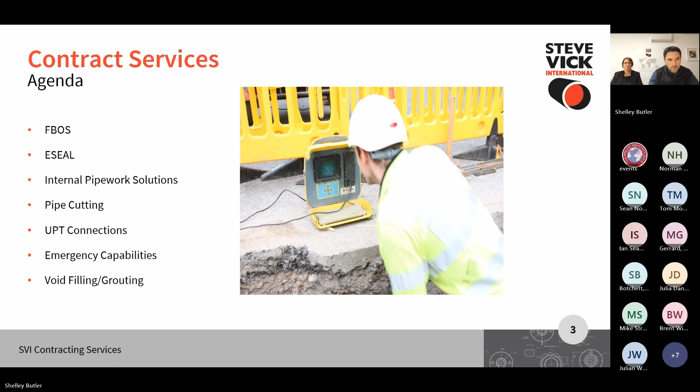For those of you that don't know, Steve Vick, my father, founded the business in 1981, and contract services has been at the heart of the business since its inception, first delivering foam bags to flow stop small diameter mains, all the way up to the much larger diameter mains that we now flow stop, and the range of services that I'll go through with you this afternoon.

We've branched out into other areas. From gas, we went into water, and now we carry out projects for the Nuclear Decommissioning Authority, and even work branching out into other things like civils as well.

So the company, we have 115 people currently employed by Steve Vick International. We have 6 depots spread around the country to serve our customers across the whole of the UK, and we have a mix of uses in these depots. Some are just bases for our contract service teams, and others are a place of supply of our products for our live mains insertion techniques and our hire business.

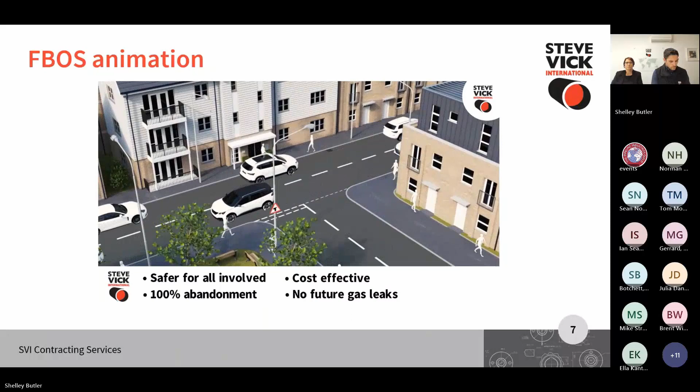The average cost for an FBOS insertion is about £3,500, which compared to the traditional three-way traffic management, reinstatement, and the issues that go with that, is very competitive. To date, since the approval in 2020, we've carried out over 1,100 successful FBOS operations. As we've added to the size range, originally 4 and 6 inch, and now up to 8 inch, the technique will prove to be incredibly popular.

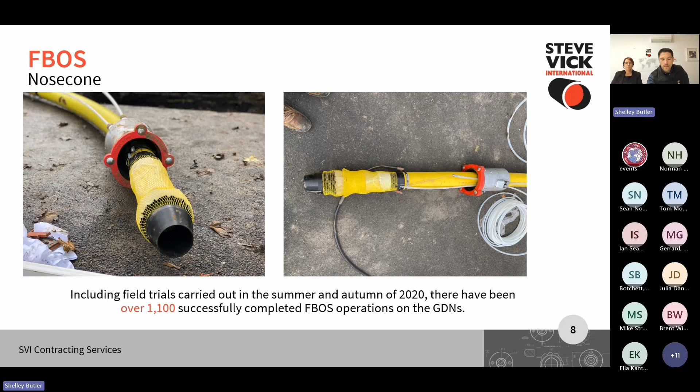Another technique that has been developed with successful collaboration with the UK gas distribution network is eSeal. This was developed in partnership with Northern Gas Networks, where you have FBOS, which is the replacement of a stub, while eSeal provides the complete abandonment of a tier 1 stub. We cover the same size ranges up to 8 inch.

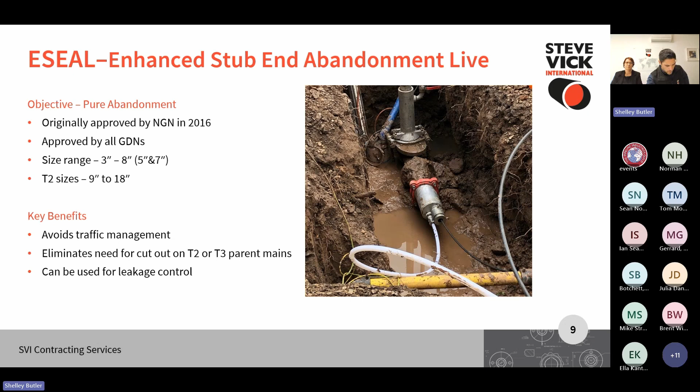So the foam bag on eSeal is housed in a small capsule that allows it to navigate some bends. And when it is at the final transition point, which is marked on the right-hand side there in a red square, the foam bag is then deployed and then straddles that final transition joint, and then the foam is then filled, then leaving the main dead.

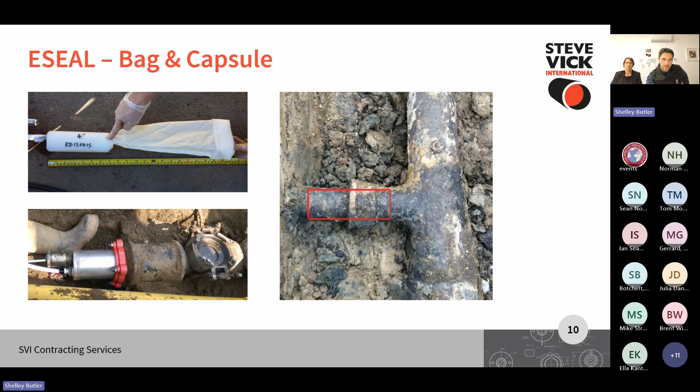So just to go into a bit more detail, the main is flow stopped using traditional foam flow stopping bags. Then the glam box is attached to be surveyed using a camera to check for size changes or off takes. Using the camera, the bag is then placed directly on that final transition joint. A set amount of foam is injected into the bag and allowed to cure for 30 minutes. When the main is left to decay, the rest of the stub is filled and handed back to the client.

The cost for eSeals are competitive again with the cost of a cutout of a parent main connection and can be installed from distances at over 50 meters. The typical cost for an eSeal over a 10-meter distance is about £2,300.

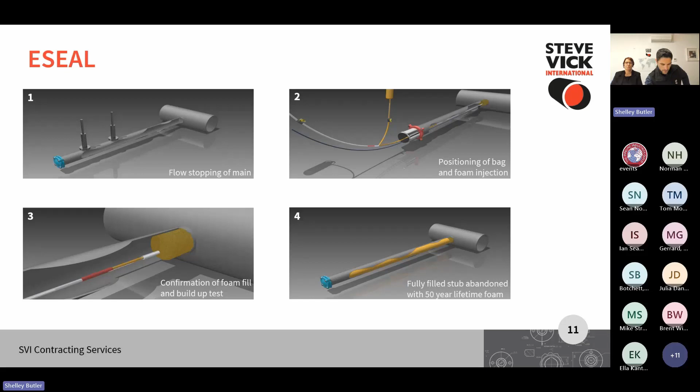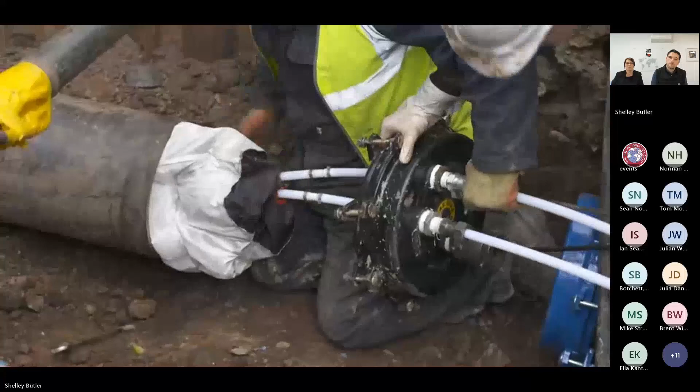But I think the technical gremlins have taken over. Apologies, everybody. Can you just check that everyone can hear me? Can you understand the video? It's stopping. Apologies, everybody. It looks like we're having some technical difficulties with that video. But the idea... Can't hear the videos either. Okay. All right. Thank you.

So the eSeal 2 technique is designed for 9 inch to 18 inch. eSeal 2 is the extension of that, the eSeal project. And the idea is for the bag to be installed again from a remote location and is filled in 2 stages. So it has an inner bag and an outer bag. And as you can see from the pictures, it's launched through a modified Steve Vick glam box. And the main is camera surveyed, and then the bag is then positioned in that final transition joint. So every time the bag is on the final transition joint before the parent main.

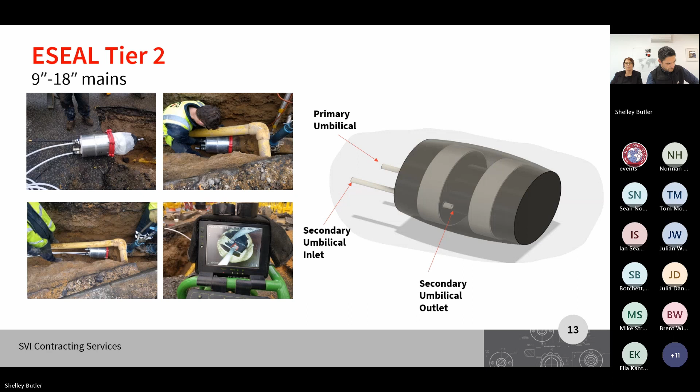Both techniques, FBOS and eSeal, are delivered as a contract service by Steve Vick International. Excavations are prepared by the primary contractor, and once the techniques have been deployed, they are then handed back to the contractor for reinstatement.

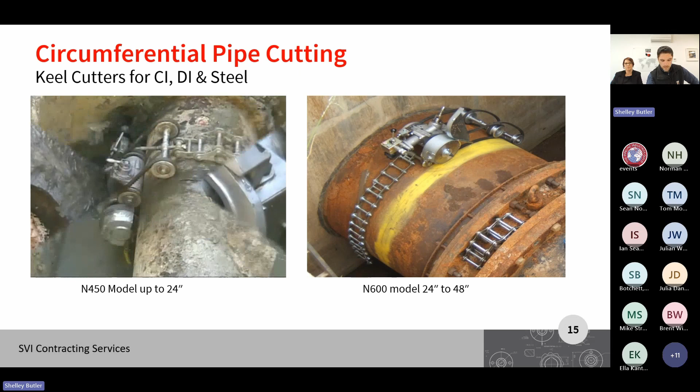Steve Vick International also offer various cutting services for our clients using a range of cutting equipment. Here we have our different models of keel cutter for the large diameter mains from 12-inch up to 48-inch. While these cutters offer excellent ability to cut mains in situ, they can be used for bevel cutting. Using guide rings, the cutters are able to cut and bevel steel or ductile pipes in preparation for jointing. The 2 blades working simultaneously will cut in 1 rotation and give you a perfect bevel of 11 degrees or 22 degrees, depending on the manufacture of the pipe and the joint you're using.

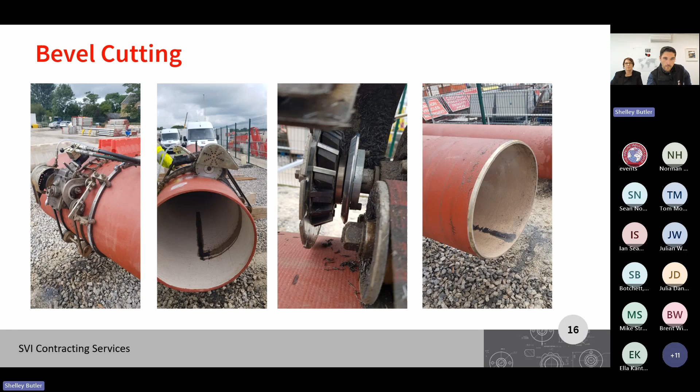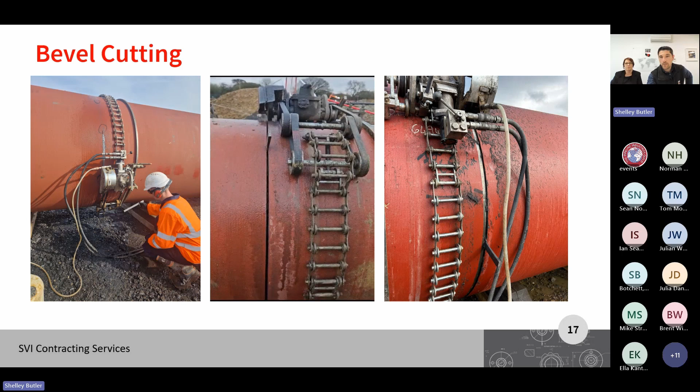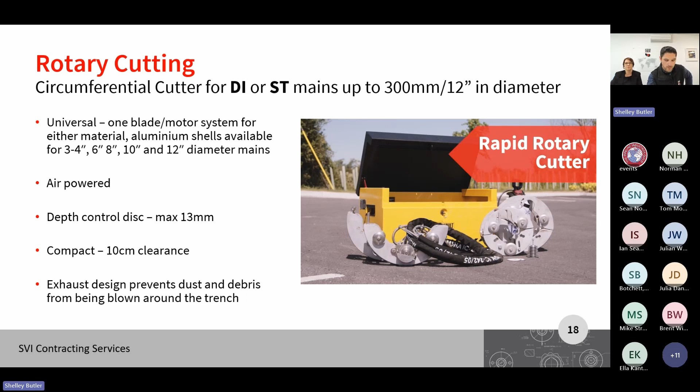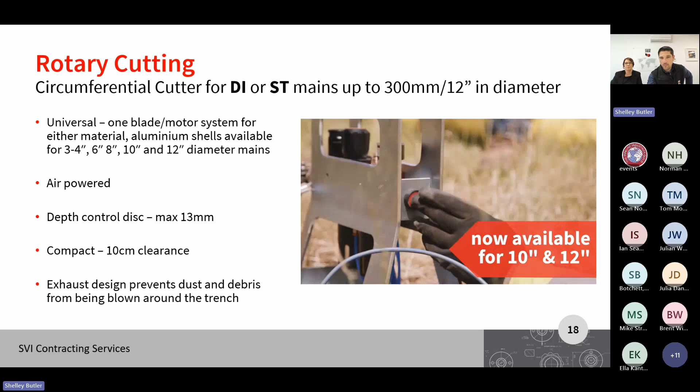We are able to cut any mains of any size in this fashion, usually in a compound before being taken to site, or we have capabilities to do the works in ground. We also offer a range of smaller diameter cutting services using our rotary and window cutters. Here you see the rotary cutter, which is used for the circumferential cuts, with a max cutting depth of 13 mil and only needing around 4 inches of clearance around the pipe to be used.

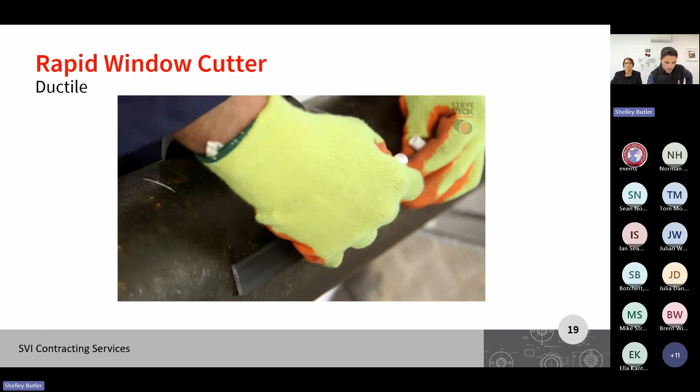We also have our ductile window cutter, which our contract services teams use. Usually for longitudinal cuts, our window cutter is typically used on inserted mains and for much longer distances than a GDN would use on a mains replacement technique.

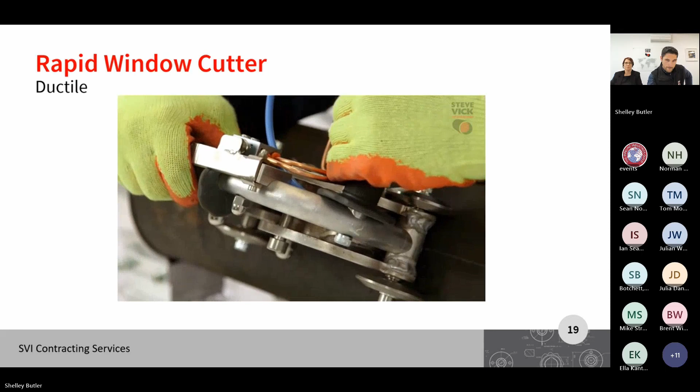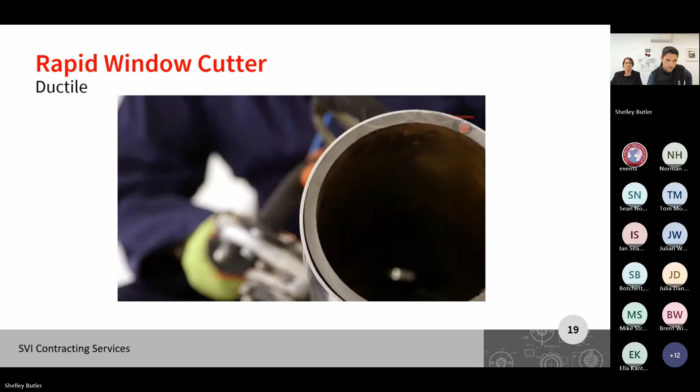This is a typical cutout that we would usually carry out for much larger operations, such as new connections or flow stops on larger mains. We also have a pipe spreader, which is used to do one single cut, and then the pipe spreader will open up the metallic to expose the PE inside.

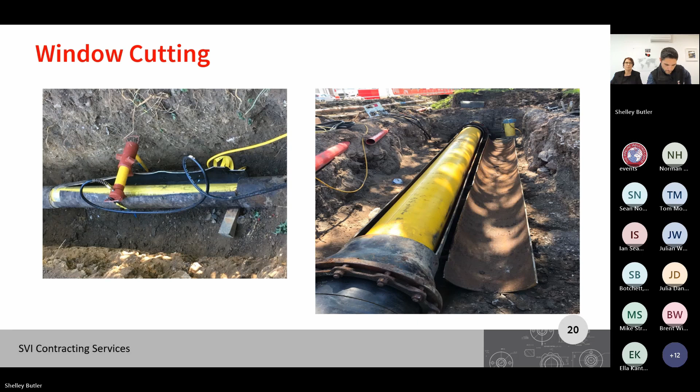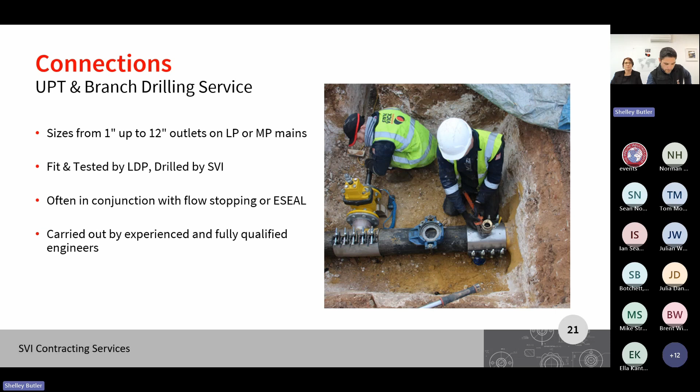An established and popular technique we offer is our grout filling service. Using our in-house designed grout rig, we can fill mains, ducts or annuluses from 3-inch up to 48-inch. We are able to put a range of products into the main depending on the customer's needs, whether it be structural or for cathodic protection. A brand new market for Steve Vick International is the filling of cable ducts for below ground cables that have been directionally drilled.

In this picture, you'll see the end seals, which are a Steve Vick product, which are wrapped around the edge to seal the ends of the pipe that was to be grout filled. And then we would fill in between our end seals for a full complete fill.

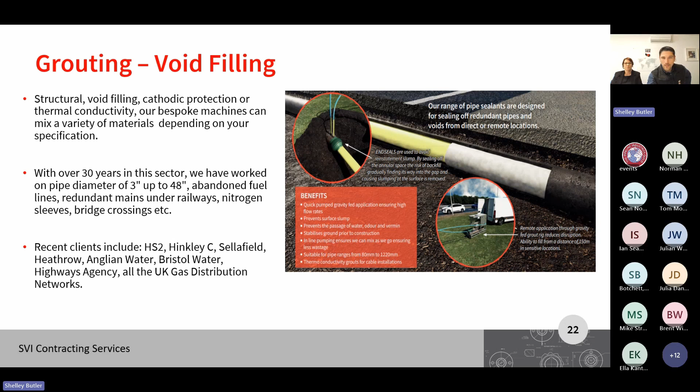So over the last 18 months, we've been working with Mott MacDonald Bentley and Anglian Water on the SPA project. This is one of the largest infrastructure projects in Europe, and this short video will just show you some pictures. There's no sound to this video.

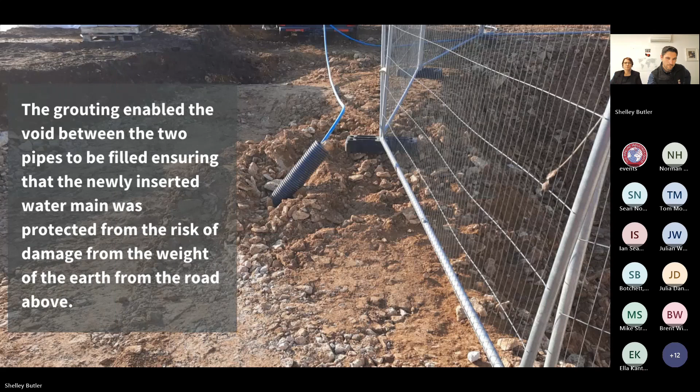So from these photos, you can see our typical setup on a grouting project. Our rig is compact and lightweight, and it can fit in the back of a 3.5-ton van, or even for Brent, we put it on a pallet and shipped it to Greenland for use on a project he had over there. This versatility of our rig gives an advantage over vat pumping.

With less waste produced and a smaller footprint on site, we're able to access projects which traditionally would have been very difficult. We can also pump to a distance of up to 150 to 200 meters away, which takes us out of any risk areas of permitry, such as trackside or in a substation, being too close to any overhead power cables.

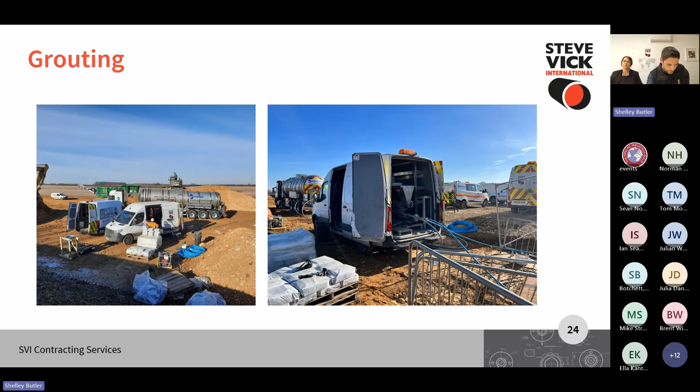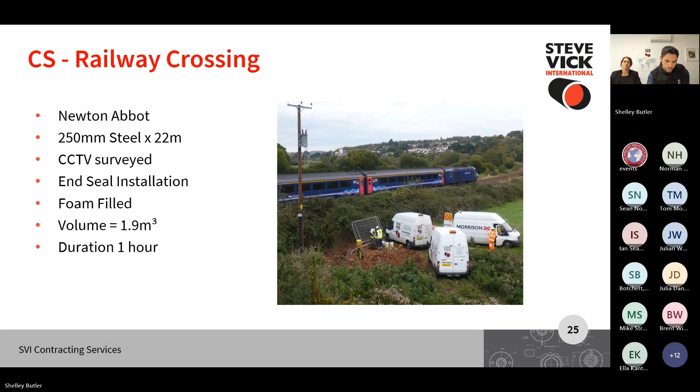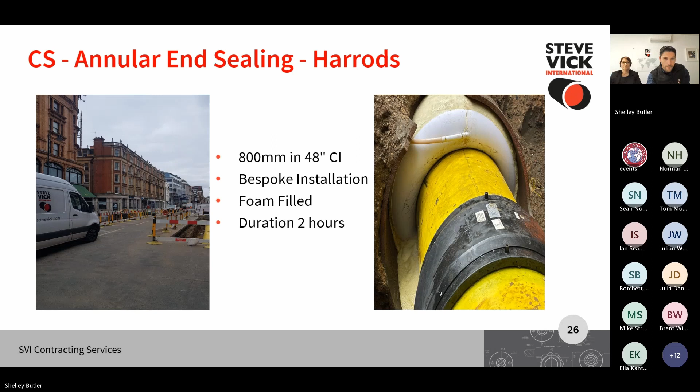Over the last 30 years, we've developed a range of products and techniques for the repair and replacement of internal pipe systems. Our client base has grown over the years to include industrial, commercial, and private networks, as well as the gas distribution networks. The next few slides are some of those techniques.

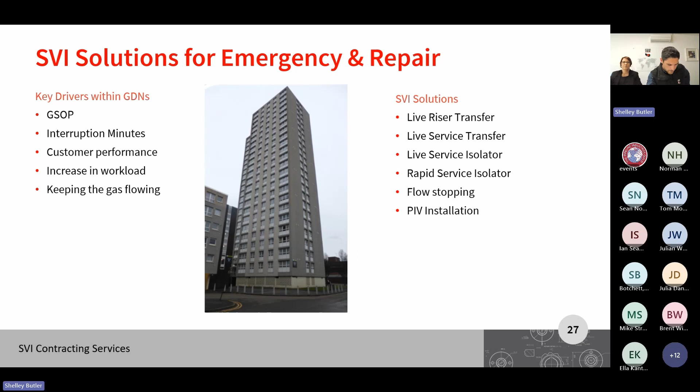A key service we offer for the replacement of an internal gas riser is live riser transfer. Steve Vick International will fit an under pressure tee to the riser in a good condition area. A new supply is then brought in and connected, tested and purged. Then we will use our foam bag technology. We cut off the leaking or damaged part of the riser, and this can be utilized on internal or external risers.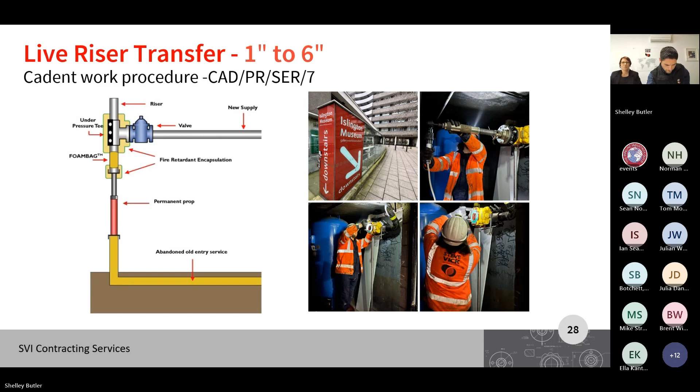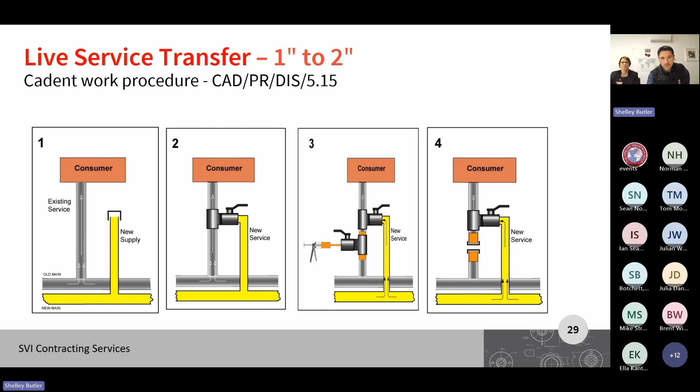Live service transfer is very similar to riser transfer, but it's for in-ground services. So again, new supply off a new main, an under pressure tee is fitted, and the service is then cut in and backfed. Then Steve Vick International will foam off and then carry out a cut and cap.

A product we supply to our contract service teams is the live service isolator. Developed alongside National Grid, now Cadent, this tool isolates the gas service utilizing a rubber stopper on horizontal or vertical pipes.

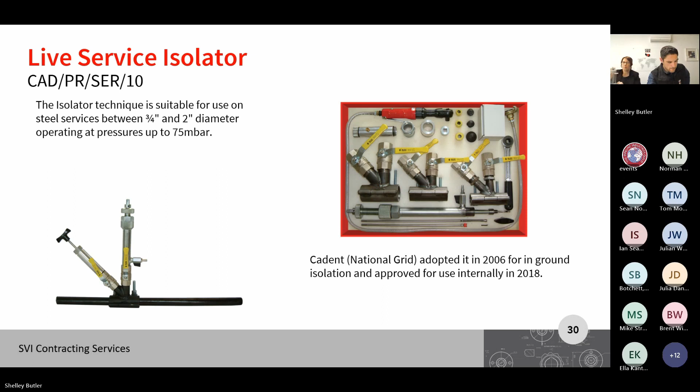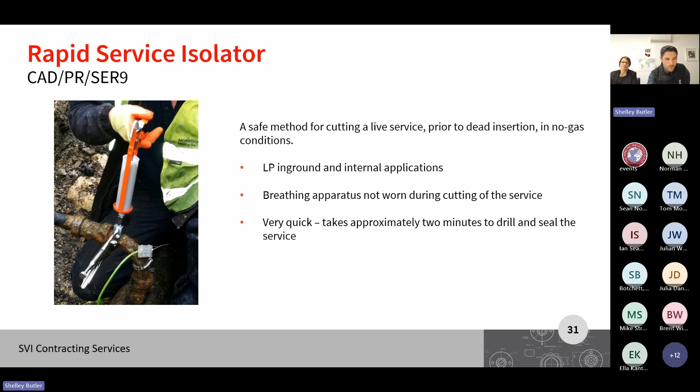The rapid service isolator is the next generation of the isolation tools utilizing our full seal sealant. It is applied via a set of modified mole grips, and this tool is perfect for emergency use. Very quick and simple and easy to use. And a demonstration of that is this case study here.

10 floors up on an external riser, rather than cutting off the whole building, we were able to get in a MEWP and get up onto the 10th floor and inject RSI sealant into an anaconda coming off that main riser, and to isolate that supply to that property.

Then we would fit an under pressure tee just below that anaconda and then run a new service into the property, removing the need for the riser to be shut off and only affecting supply to one customer, saving interruption, massive cost without having to put scaffolding up. It's a huge saving for the GDN.

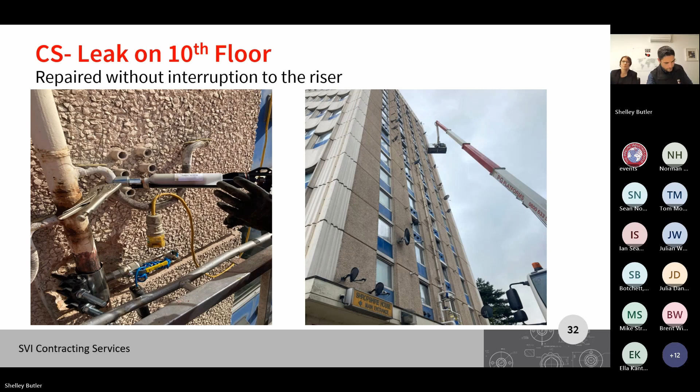Our Injecta-Seal service is applied on leaking joints of screwed gas pipework. Where jointing sealant has typically dried out, this kit injects a small amount of sealant into the threads via a compression clip. This is a quick and low-cost repair of a gas system without having to decommission the network.

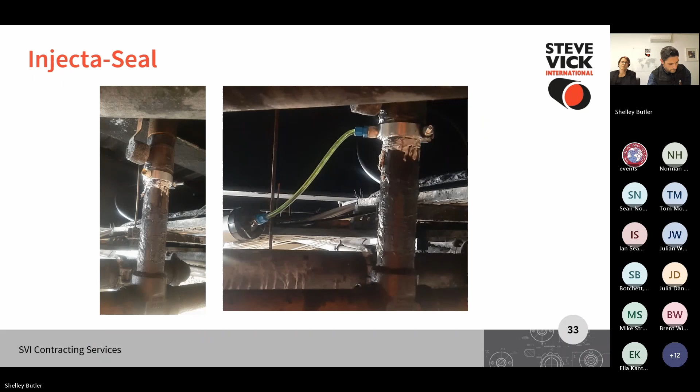Pipeline isolation valves, PIV. Over time, in areas around high-rise multi-occupancy buildings, the isolation valve cover can be disturbed or removed, meaning no form of isolation for the building is visible. So using a hybrid of our live service transfer technique, Steve Vick International are able to create a way for our clients to install a new pipeline isolation valve without interrupting gas supply.

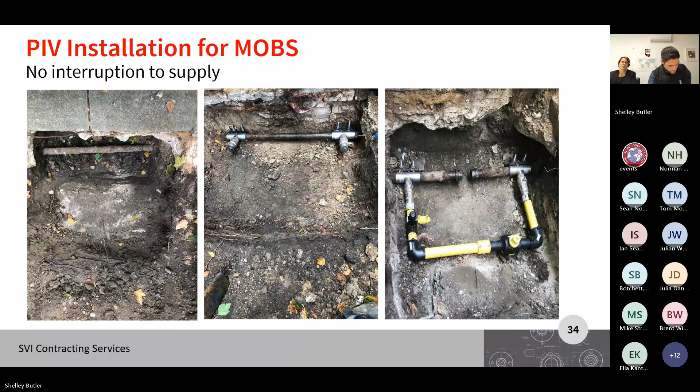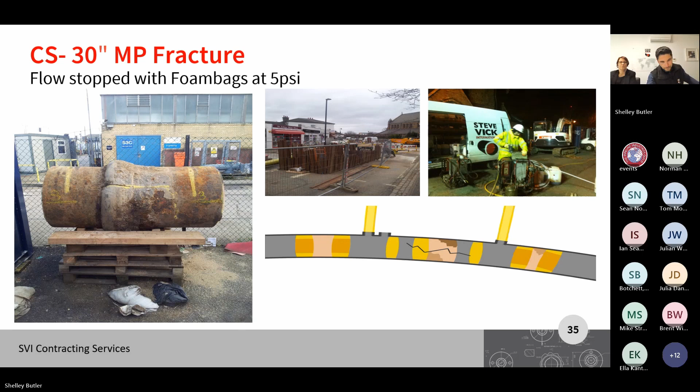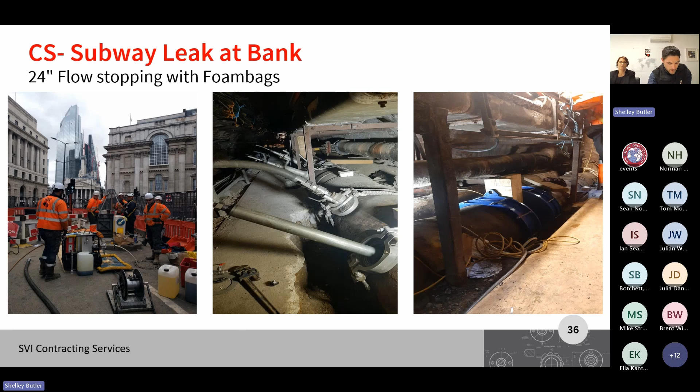So that's a snapshot of what we do at Steve Vick International for our contract service teams. I'd be happy to take any questions that anyone may have.

I've got one here, which is: is cutting fluid needed to cut steel pipe? Yes. When cutting steel, it's absolutely mandatory that you use some form of soluble cutting solution. You can use just water, but it does wear on the blades on the machine a lot more. So it's always advisable to use cutting solution. However, some pipes are not able to do that because of the nature of what's inside them. So it's trying to find materials that you could use on, say, drinking water is what I'm trying to say there.